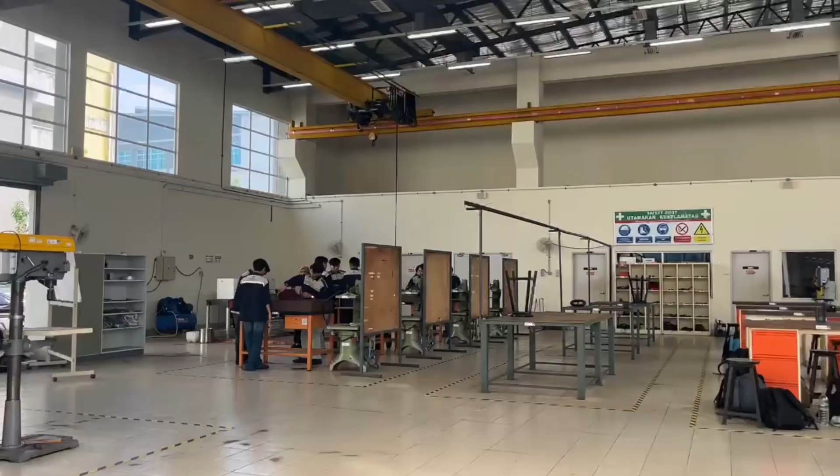The objectives of our case study today are to analyze the safety and sustainability practices used in metal casting workshops, to identify existing technical, safety and sustainability issues, to propose actionable solutions that align with relevant codes and standards, and to evaluate the balance between cost, safety and environmental impact.

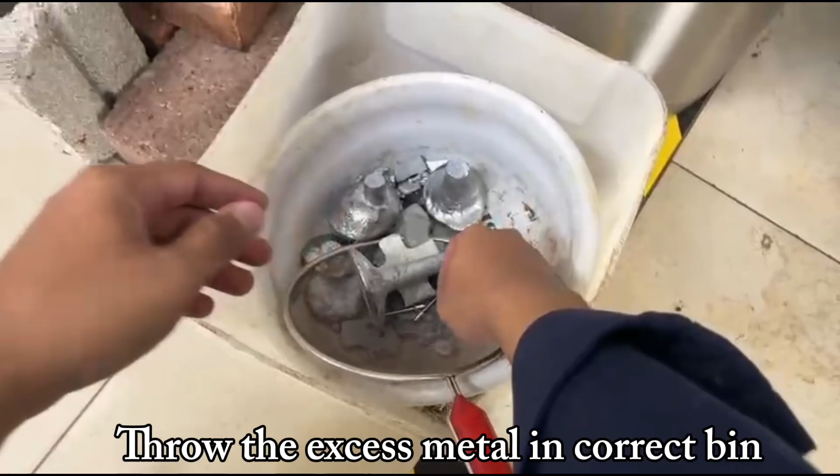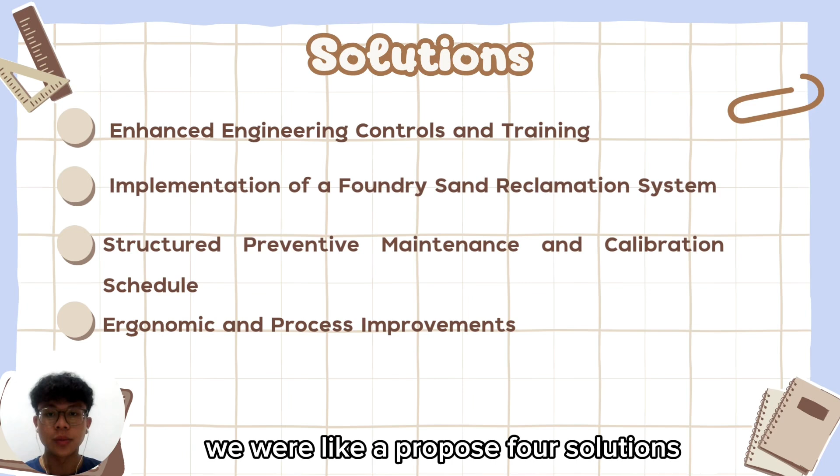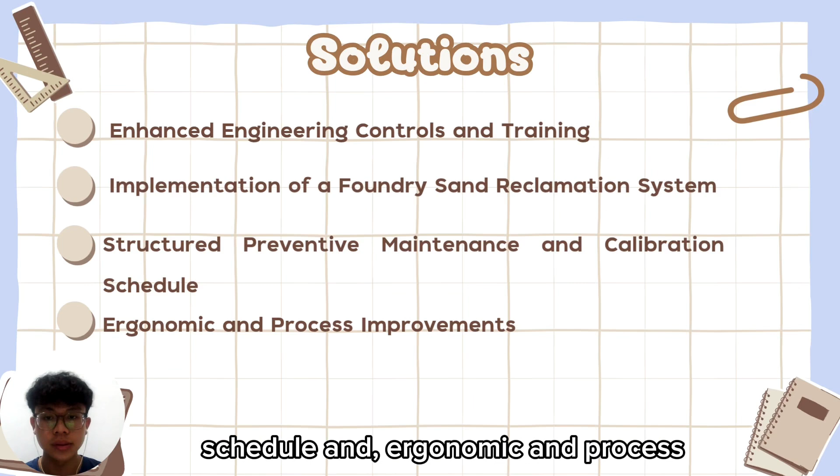Now we will look at our proposal of solutions and applications of codes and standards in the metal casting workshop. We would like to propose four solutions: enhanced engineering controls and training, implementation of a foundry sand reclamation system, structured preventive maintenance and calibration schedule, and ergonomic and process improvements.

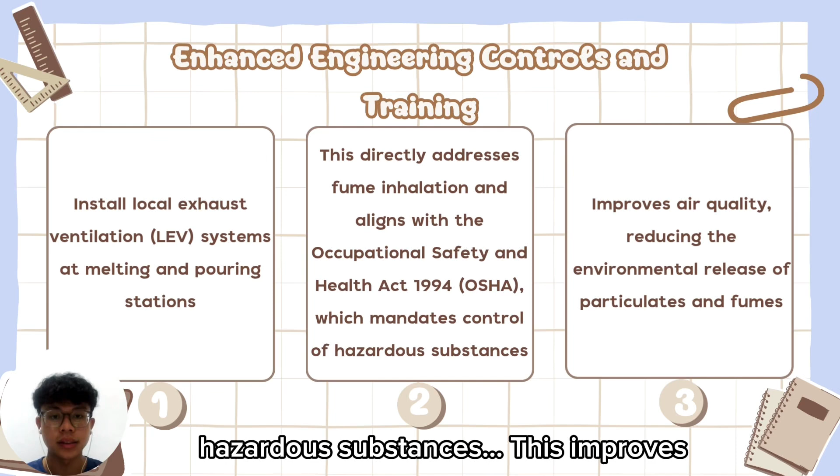For our first solution, we should install local exhaust ventilation systems at melting and pouring stations. This directly addresses fume inhalation and aligns with the Occupational Safety and Health Act 1994, which mandates control of hazardous substances. This improves air quality, reducing the environmental release of particulates and fumes.

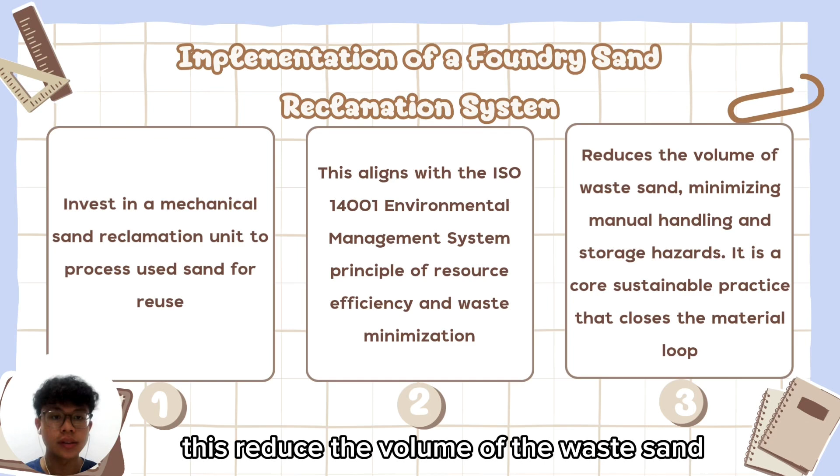For our second solution, we should invest in a mechanical sand reclamation unit to process used sand for reuse. This aligns with the ISO 14001 Environmental Management System principle of resource efficiency and waste minimization. This reduces the volume of waste sand, minimizing manual handling and storage hazards. It is a core sustainable practice that closes the material loop.

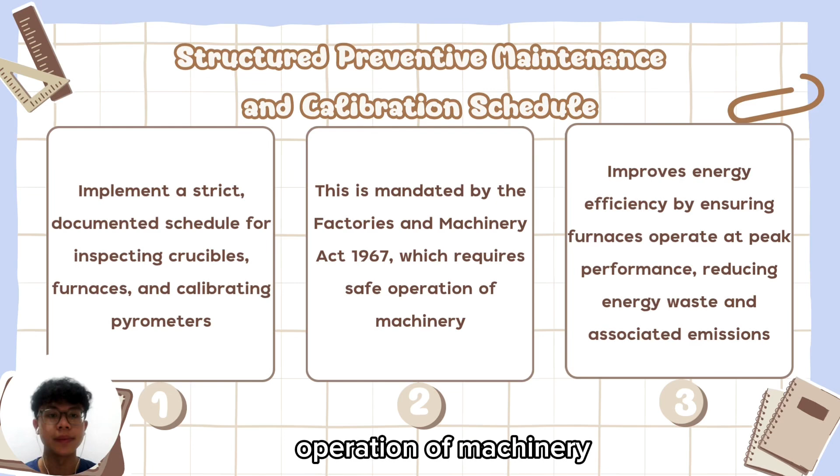For our third solution, we should implement a strict documented schedule for inspecting crucibles, furnaces, and calibrating pyrometers. This is mandated by the Factories and Machinery Act 1967, which requires safe operation of machinery. This improves energy efficiency by ensuring furnaces operate at peak performance while reducing energy waste and associated emissions.

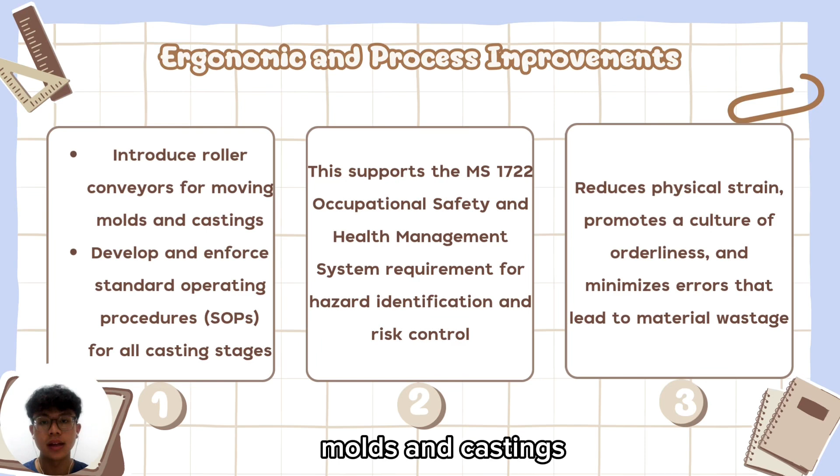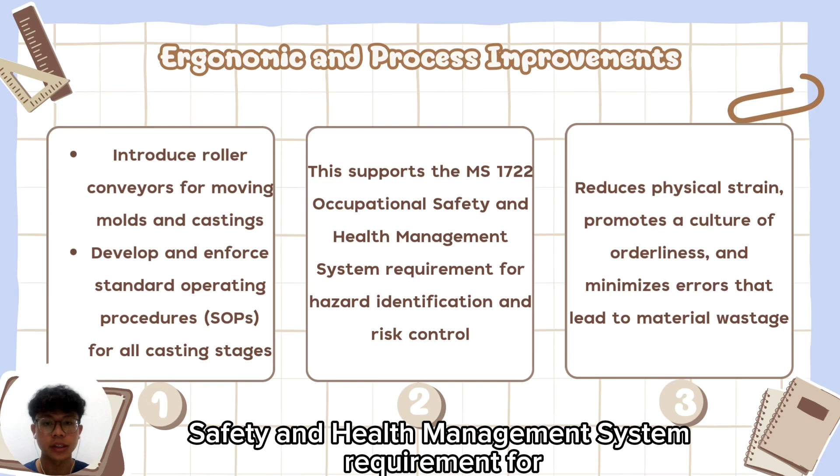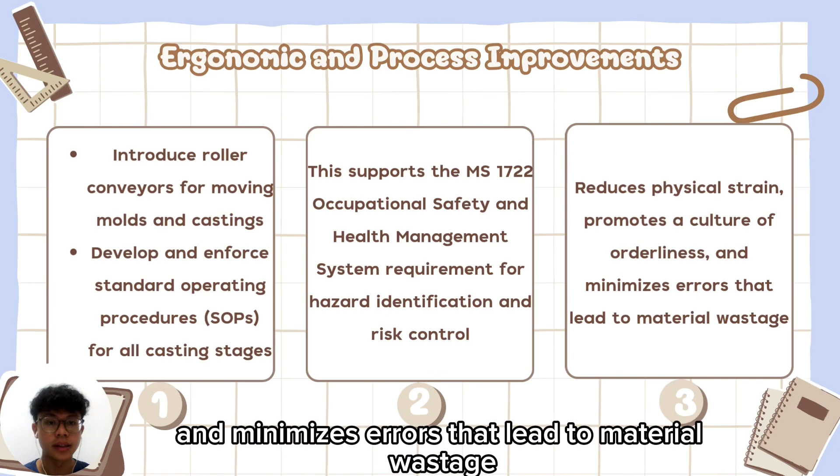For our last solution, we should introduce roller conveyors for moving molds and castings. We should also develop and enforce standard operating procedures for all casting stages. This supports the MS 1722 Occupational Safety and Health Management System requirement for hazard identification and risk control. This reduces physical strain, promotes a culture of orderliness, and minimizes errors that lead to material wastage.

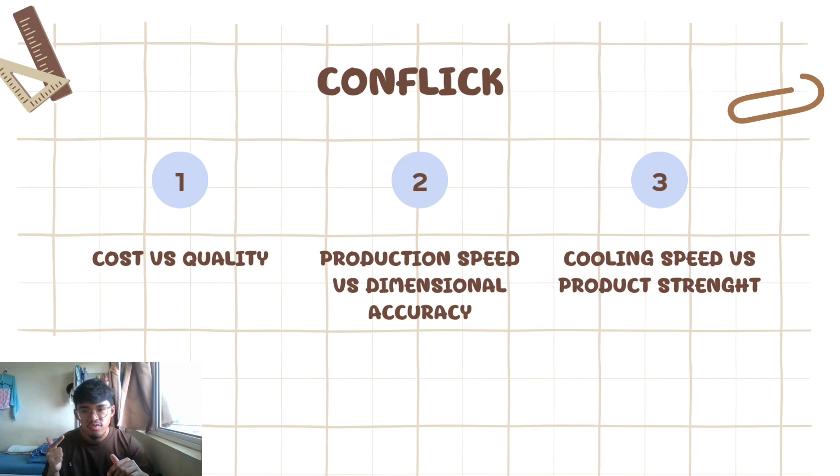Now I will tell you about conflicts required in workshop industry in metal casting. There are three conflicts that can happen in the workshop environment: cost versus quality, production speed versus dimensional accuracy, and cooling speed versus product strength. I will give justification and the solutions used in industry.

Firstly, cost versus quality. This focuses on material selection for making a mold and finalizing the product. The justification is, if we use cheaper sand for making a mold, the advantage is price, but the quality will be bad. For example, river sand is cheaper but cannot withstand high temperatures, such as the 800 Celsius needed for aluminium metal casting. So we cannot use cheap sand for metal casting.

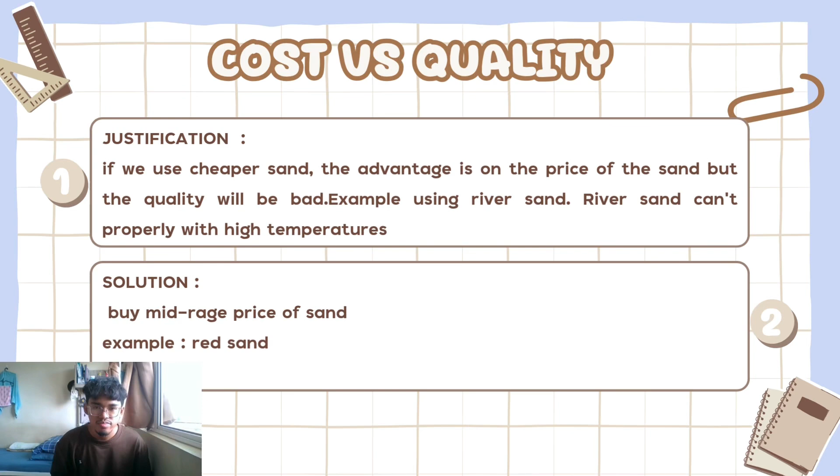So my solution for this is to buy mid-range priced sand. Why mid-range? Because it balances the price with quality. For example, red sand can withstand temperatures of 800 to 1000 Celsius.

The second conflict is production speed versus dimensional accuracy, focusing on the effect on the product. If workers in industry want to finish their casting quickly to produce more than the standard time, the dimensions will not be constant or specific. This means when workers rush to finish making many products quickly, the dimensions will not be the same as originally planned.

So the solution is that workers need to make the item properly and follow the procedure step by step carefully. For making a mold, they need to work properly and safely, so the finalized product will be a perfect product.

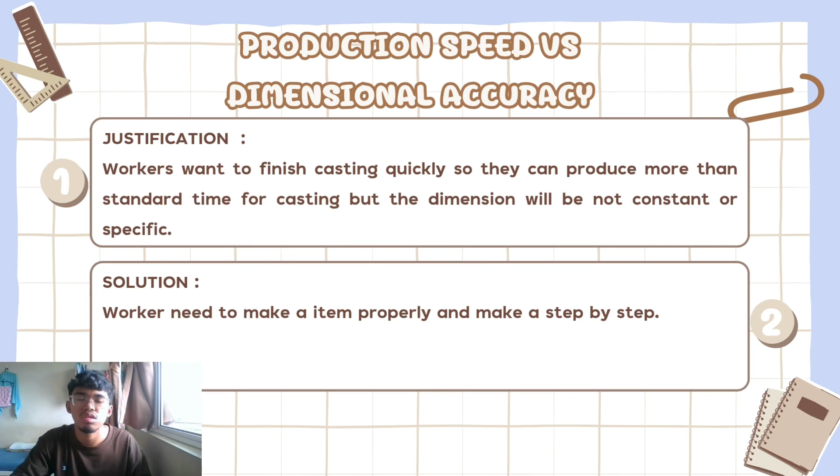The third and final conflict is cooling speed versus product strength, focusing on the finalized product after pouring the metal into the mold. The justification is, if we cool the metal too fast, it saves time and increases productivity, but because we rush and don't take time to let it harden properly, it can become cracked or develop internal stress in the casting.

So our solution is to let the product cool in the air to ensure its hardness is achieved perfectly. After the product is perfectly hard, we can put it in water, and we can see the difference between fast cooling and taking time to achieve proper hardness of the product. Okay, that's all.

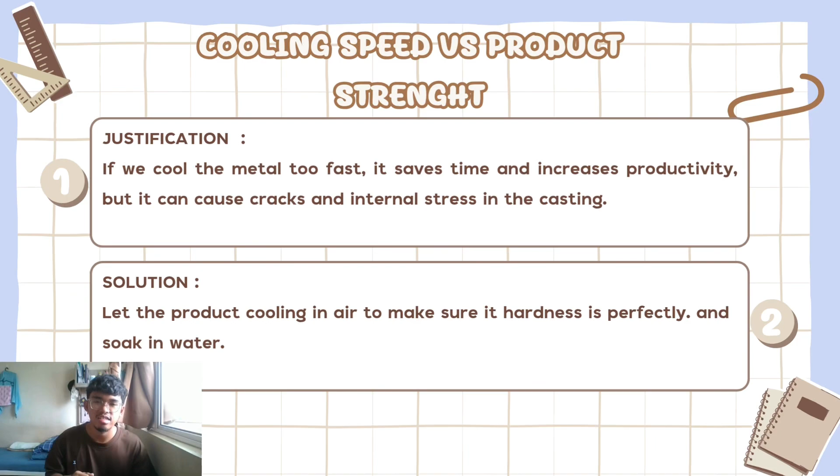In conclusion, our analysis has met its objectives, revealing critical gaps in the metal casting workshop's safety and sustainability. While foundational practices exist, significant risks from fumes, ergonomic hazards, and the unsustainable linear disposal of foundry sand were identified. Based on our evidence, we propose a green sand initiative to transition to a more reclaimable sand system for practical training.

Secondly, we would also like to introduce safety stand-down sessions where students and staff work together to identify potential safety hazards in metal casting workshops.